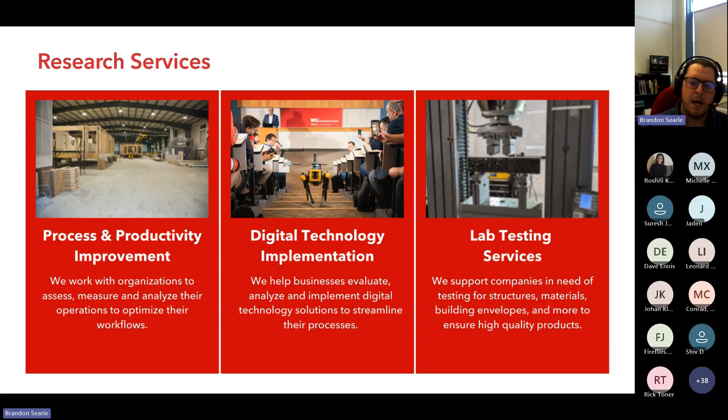Beyond that, and I guess kind of overlapping with our research services, are areas of expertise. So again, our process and productivity improvement, mostly led by our chair, Dr. Zhen Lei, focuses on productivity, safety, and quality improvements using simulation, optimization, different digital technologies, including scan to BIM, focused on optimized factory layout, as well as DFMA.

We also have digital tech implementation. This is focused on BIM and VDC, or new technologies coming into the sector that support moving activities from on-site to off-site. We're growing our structures and building enclosure testing lab, and that's in collaboration with Dr. Alan Lloyd here at UNB. We focus on panelized and volumetric modular connections, MEP connections, construction material testing, and recently launched our building enclosure testing lab off campus.

And then finally, the benchmarking and innovation in construction. We're seeing a lot more activity in this area where government and the industry is looking at understanding the maturity of our sector to respond to housing crisis, shortage in healthcare facilities, schools, etc. And so understanding what are the gaps, what training is required, what policy changes are needed, and how do standards and procurement strategies need to change. And so we do some research in that area as well.

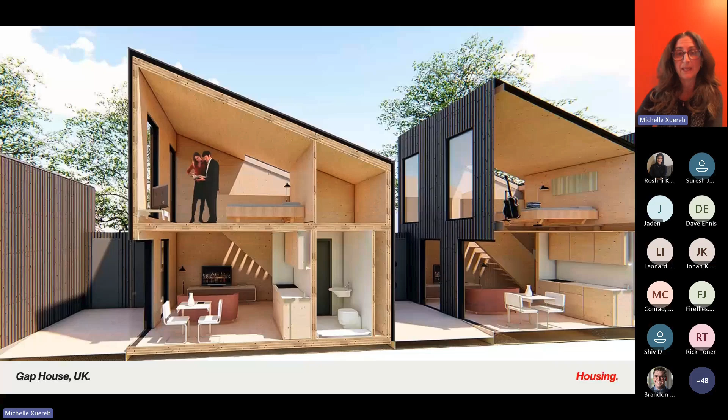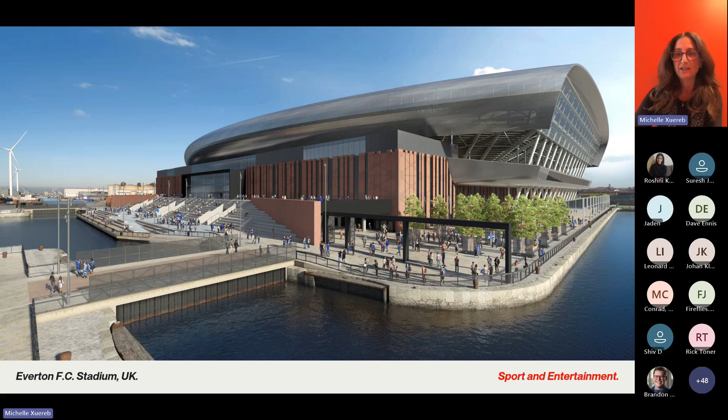Everton FC, so a new 50,000 seat stadium, which used a combination of generative design processes and hybrid OSC methods for prefabrication, prefabricated wall panels and framing systems.

Here in Toronto, we've got a huge portfolio of private sector multi-unit residential, spanning from mid-rise to high-rise, and with such a large and diverse client base and the knowledge of our UK counterparts, we've had an interesting platform from which to launch our efforts.

So first of all, why OSC? In terms of trends, we know that we have parallel drivers occurring at once: an affordability crisis, a housing crisis, climate crisis. And meanwhile, we have both a skills gap and a productivity problem in our workforce. In parallel, we have a technology revolution underway that we can use to shift how we make buildings from design through execution, where we can track supply chains, plan a building using principles of circular economy and design with considerations for how we assemble the building and then how we disassemble it at end of life.

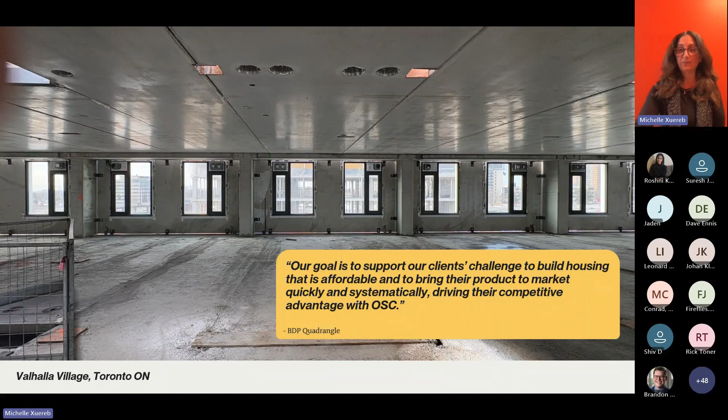Here at BDP Quadrangle, our goal is really to support our clients' challenge to build housing that's affordable and bring their product to market quickly and systematically. The purpose here is to really drive their competitive advantage using OSC.

I'm one of the co-directors of BDP Lab, which is a place where we conduct research across the practice. We collaborate with industry and academia, people like the University of New Brunswick, and we put this piece on DFMA, or design for manufacture and assembly, together as a snapshot of industry and ourselves in this context. It's sort of an internal document, but it got us all talking.

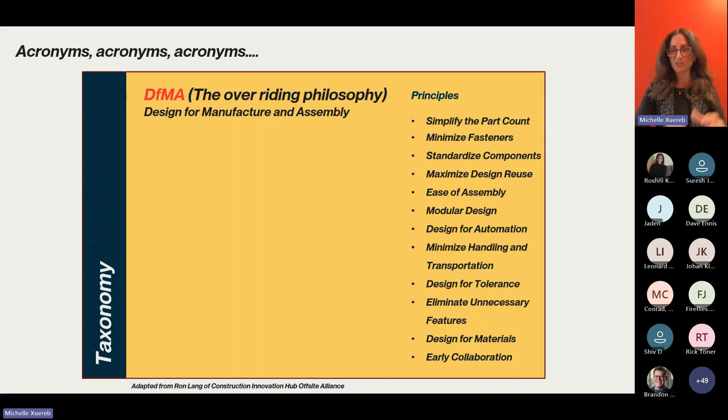One of the things that came up is that this field is extremely acronym heavy, so I like to start by defining the ones I'm going to be using. DFMA is really that overriding philosophy for all the means of delivering the offsite approach: simplifying the part count, designing for automation, maximizing design reuse. You've got the list right there.

In the UK, they tend to use the term MMC, or modern methods of construction. This tends to be the one I find most useful because it's a way of thinking about multiple non-traditional technical solutions to accelerate construction. Some of those methods are used offsite and some are on-site, and that's actually kind of how I've structured my presentation.

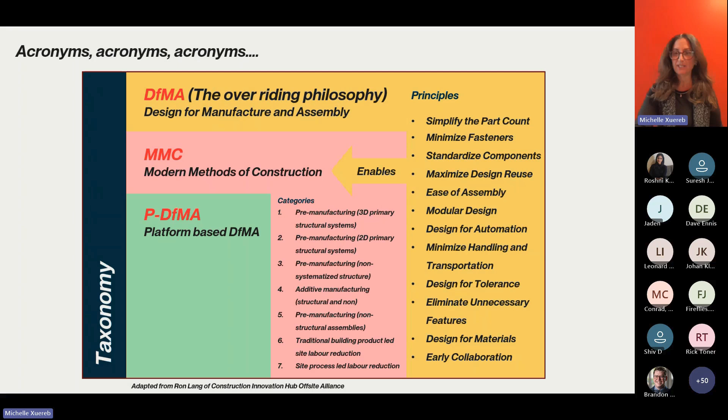Then you've got platform-based design, which is really something we're seeing evolve, where construction is thought about more like the automotive industry - product delivery rather than project delivery. So it's a very different way of thinking, and you're seeing some companies come out that maybe weren't even in the manufacturing side before - an interesting kind of emergence from outside the industry.

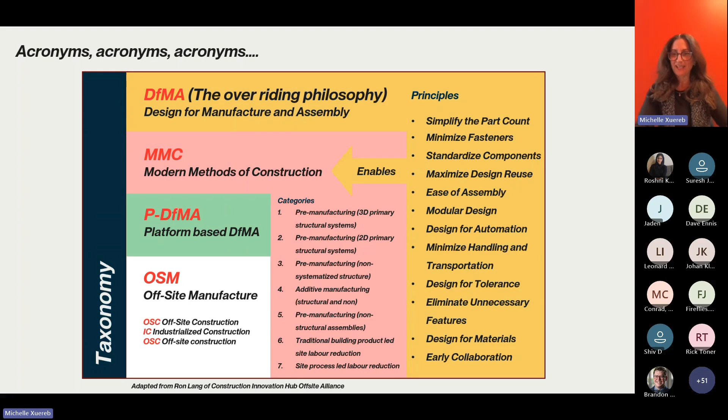And then, of course, offsite manufacturing, offsite construction, industrialized construction - we'll likely be using these terms interchangeably, but I liked this one piece that looks at all that taxonomy together.

So as I mentioned, I find this MMC category really useful as a way of organizing my thinking in this space, with the first 5 categories representing the offsite and near-site pre-manufacturing, and the last two being about speeding up that efficiency of traditional processes on site through robotics and other means. What I'm finding in high rise is we're really looking at those first five, and some of those more than others - you'll see some examples that I put out there.

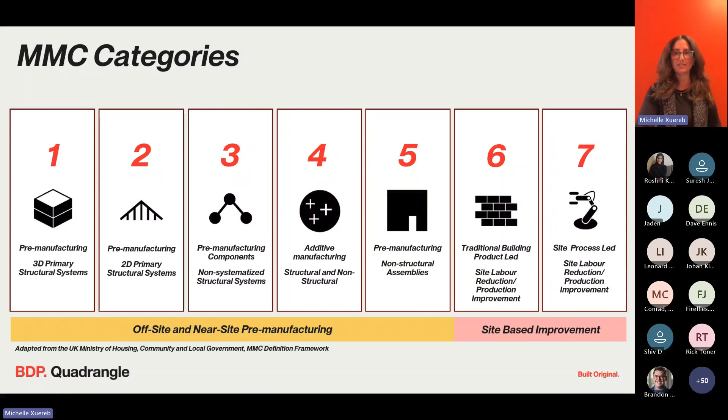I'm going to give you an overview of multi-unit residential projects. Some of them are by us, where I'll go into a little deeper detail - I'm going to go in deep on 3 projects, and the other ones I'll just touch on so we can get an overview of what's happening. Some of the precedents started in another sector, and then I'm going to demonstrate how they've led to innovations in the multi-unit residential space. And the other thing I'll say is I'm definitely giving it a slant from the GTA, or the Greater Toronto Area.

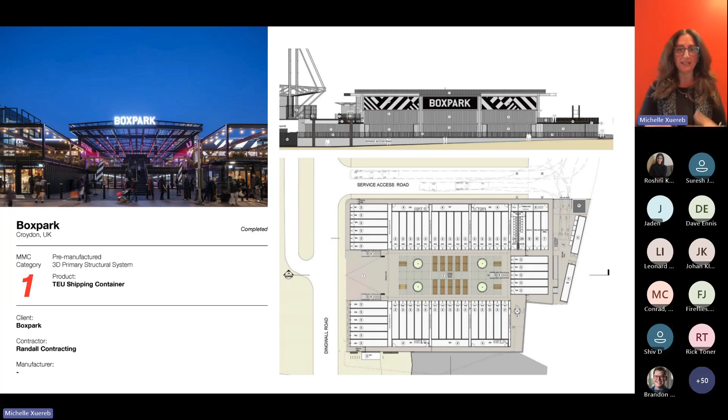Starting with pre-manufacturing, so 3D structural systems. This is the project I mentioned in the beginning, Boxpark, which was about reusing existing shipping containers on a site where nothing existed yet, to bring some economics to this neighborhood. It was meant to be temporary but has remained anything but. People really love it.

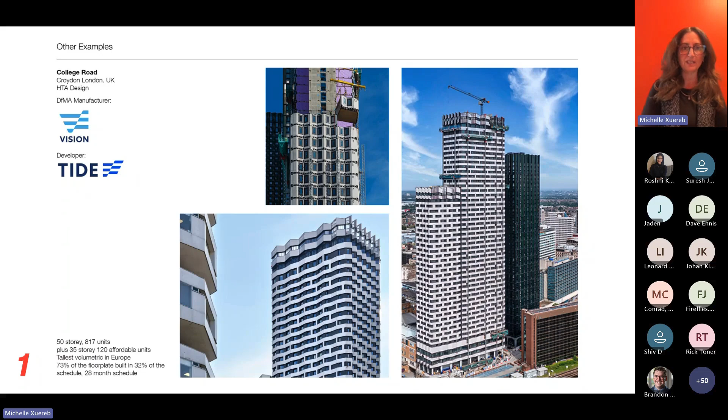For me as an architect, what I love about these is they don't look modular. You look at them and they've got an architectural finish to them, which tells me we're developing and getting further in this way.

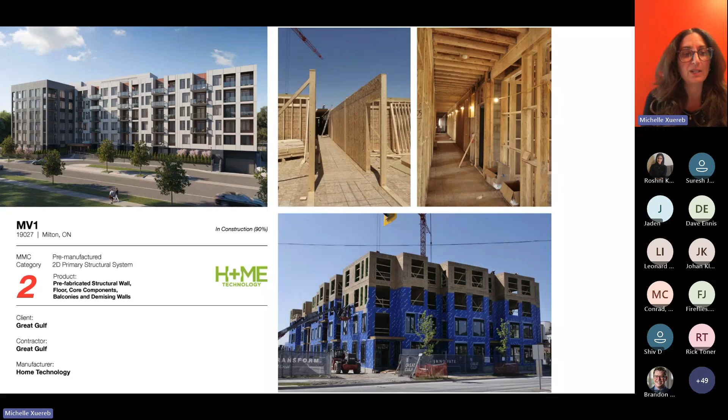So 2D primary structural systems - this is category 2. Some examples of things we've done in this space include MV1, structural wall panels - prefabricated structural walls and floors, and the demising walls. We've done a couple of these with Home Technology.

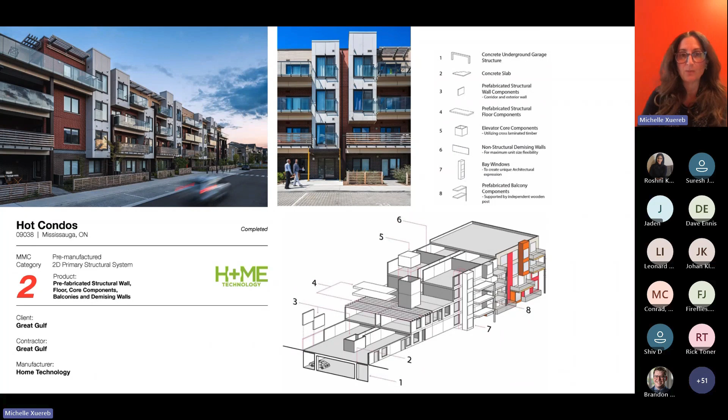Hot Condos was the first one we did - the first that they rolled out of their factory back when they were Brockport. We did a lot of learning about tolerances and how pieces fit together. And then, of course, other companies in this space like Assembly and Panelized.

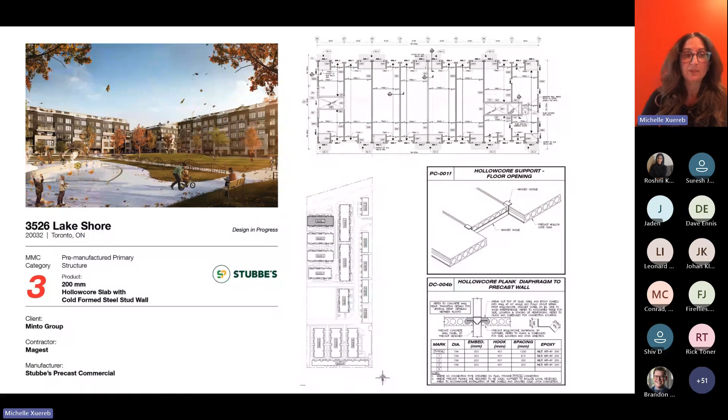Into category 3, pre-manufacturing components - non-systematized structural systems. This is things like precast hollow core slab, which we're doing on this one here on Lake Shore. This is all about the slabs and cold formed steel for the walls.

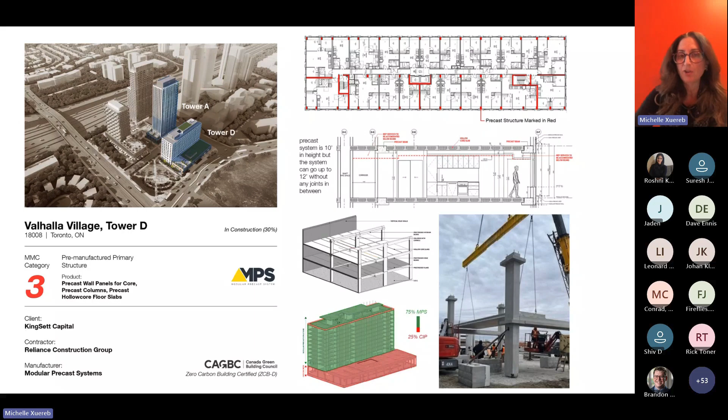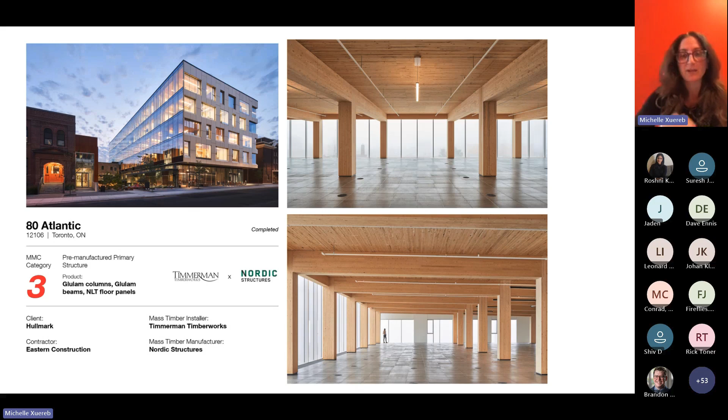This one is about mass timber. We used glulam columns and beams and NLT floor panels, partnering with Timmerman and Nordic. This was for Hullmark here in Toronto, and it was the first mass timber office building built here in a century.

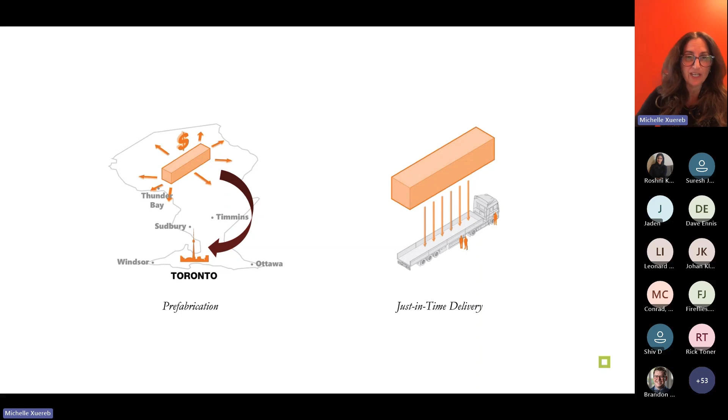Construction schedules really took advantage of this prefabrication - it was all about just-in-time delivery, and I got to see it live since this was one of my projects. It was exciting - one of the quietest sites I've ever been on, extremely clean, with things happening efficiently and effectively. It probably could have gone faster depending on when things arrived on site and how the logistics tied together.

This was the first one we were doing, and the first for a lot of the trades involved. And of course, one of the aesthetic advantages, speaking as an architect, is the ability to expose that timber.

So really here in Toronto, this has become kind of a hive of mass timber activity. Over the past few years, we've seen an explosion of mass timber proposals, a lot of them on the commercial side. And the question we were asking was, where is the residential?

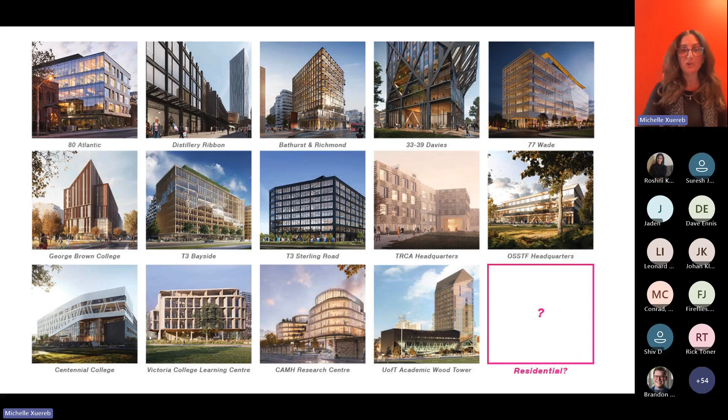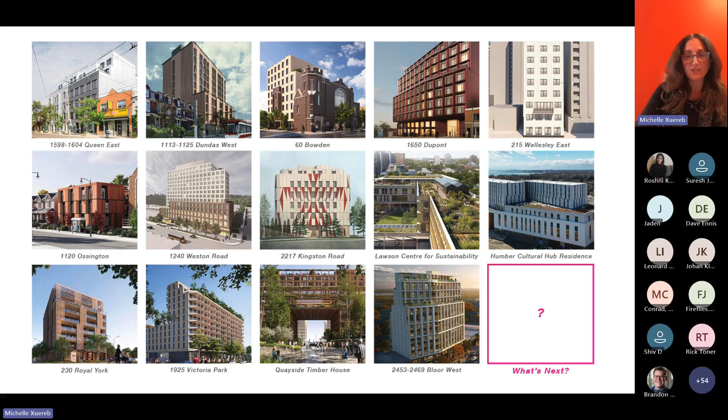There were a few low-rise mass timber projects initially, but since the Ontario Building Code introduced encapsulated mass timber provisions, we've seen a growing number of residential projects announced, appearing at a variety of scales and across a range of residential types.

So I'm going to go a little deeper into 2453 Bloor Street West. This is a mass timber building where it's the primary structural system, glulam columns and beams. It's really about understanding the differences between mass timber and what we've traditionally been used to working with at this scale of building here in Toronto.

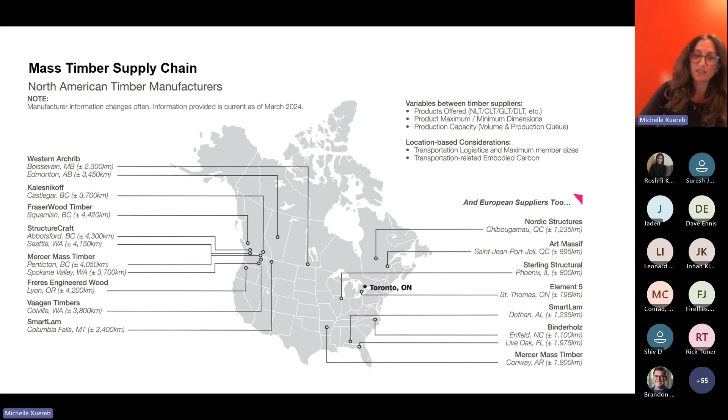The first piece was really understanding the supply chain. Where are things coming from? Who has things available, and how do we deal with that? How do we engage with this part of the industry? Given our experience on 80 Atlantic, we had a little bit of a sneak preview.

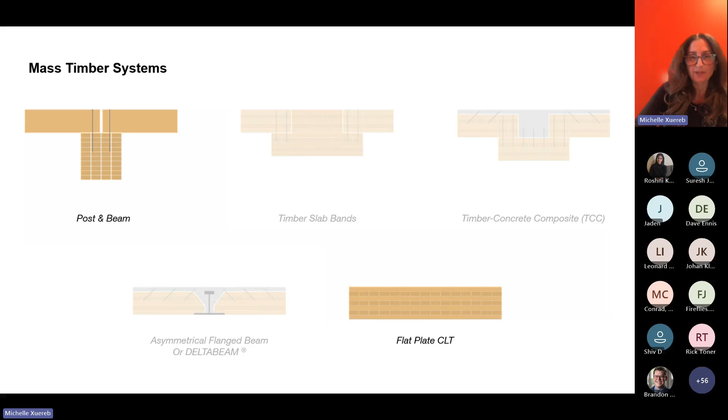So looking at what kind of systems exist: post and beam, timber slab band, timber concrete composite, asymmetrical flange beams, flat plate CLT. The focus for multi-unit residential was really on two systems, post and beam and flat plate. So we decided we needed to figure out how these applied and how you brought this into the residential side.

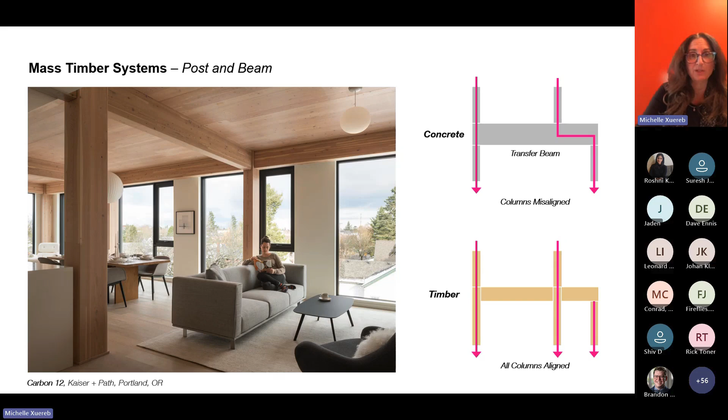Looking at things like structural alignment, which is always key, yet something we don't always tend to do here in the Toronto market. From these you can see it looks great on the inside in terms of finishes. Then you've got the flat plate CLT, which means you have no running beams to get across with your mechanical systems.

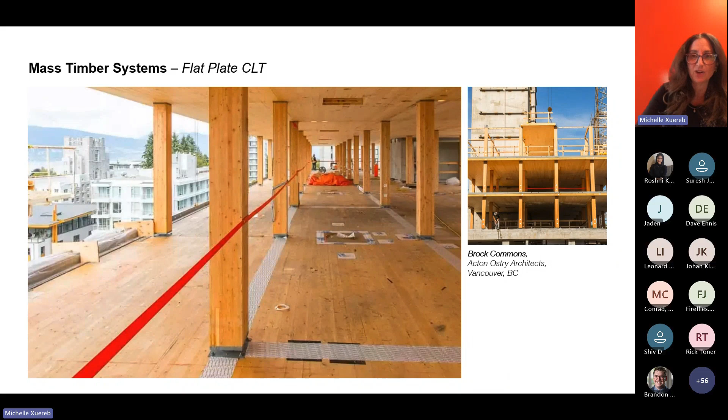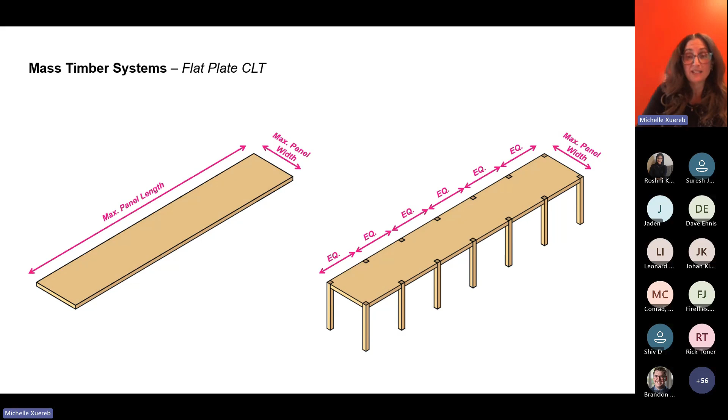This system requires each CLT panel to be supported by columns at regular intervals along the panel length. For maximum structural efficiency, these columns need to be placed between 3 and 3.5 meters apart. Ideally, the spacing is determined by the supplier's minimum or maximum panel dimension, because the larger the panel, the more efficient.

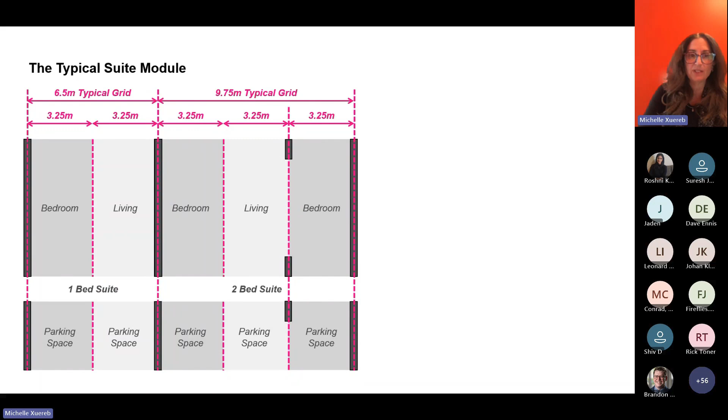Just a couple of examples here with Brock Commons. For us, we took our typical suite module and asked how this actually applies. So taking your parking module, knowing you have to run these on top of each other, what should that grid size be? Then working with a local example, looking at Element 5 in St. Thomas, Ontario.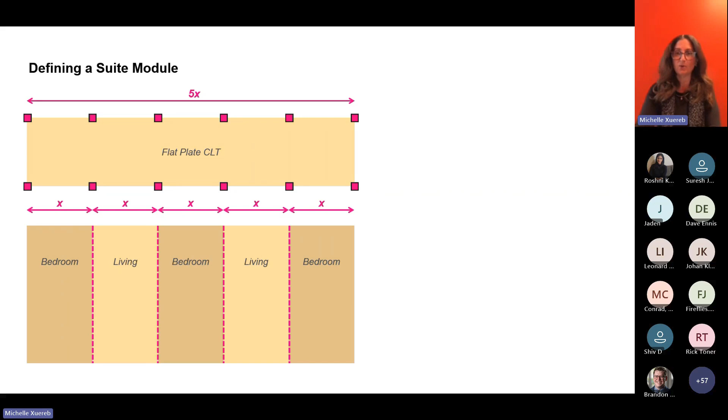We're looking at an overall panel length of 16 meters and a maximum width of 3.1 meters, and then how each of these would ideally be spaced over the panel length to work with the room layouts. This naturally begins to define our typical bedroom and living spaces, and our resulting suite widths and suite areas.

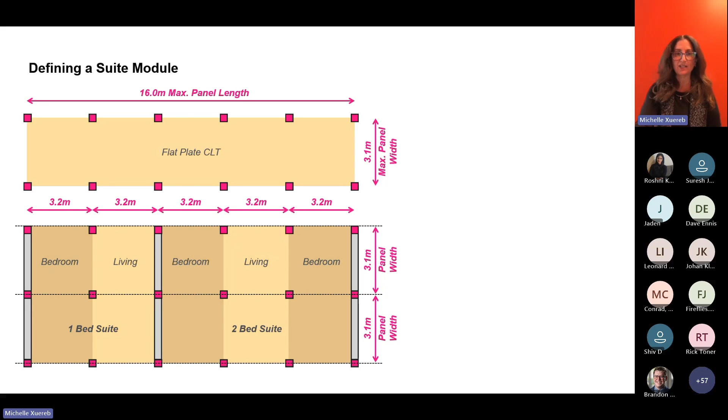Zooming out again, this is exactly the approach we took on the development on Bloor Street, where we began by laying out those panels, layering on the grid spacing for a flat plate CLT system, and then selecting that column spacing as we talked about.

Then defining where those panels, where the center of the floor plate is the zone for all of the vertical circulation services, leaving those outer panels clear and available for the suites.

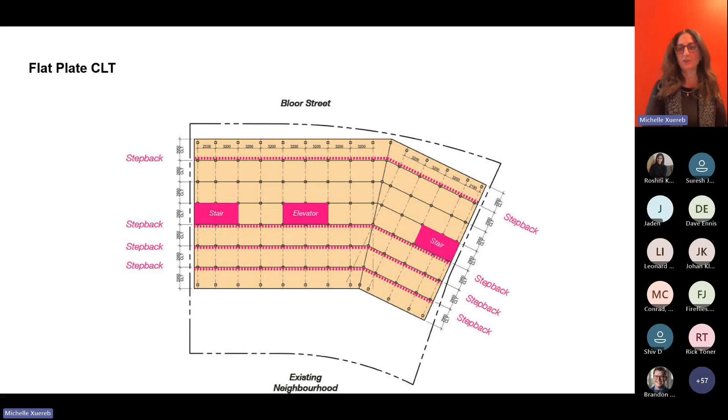Given that this is an intermediate rise building here on the avenues, we're required to do some stepping back, so we knew we had to have an awareness of that. If we just followed the pure zoning, those step backs would be a little more arbitrary, but knowing we're working with the CLT, we had to step back at more regular points.

Adding in that corridor, getting to the point where you've got a typical floor plan based on a mass timber structure, meant having to start this process right at the very beginning of the design. Then when you go up through the levels of the building, maintaining this consistent structural logic, really defined by the ideal proportions of the CLT.

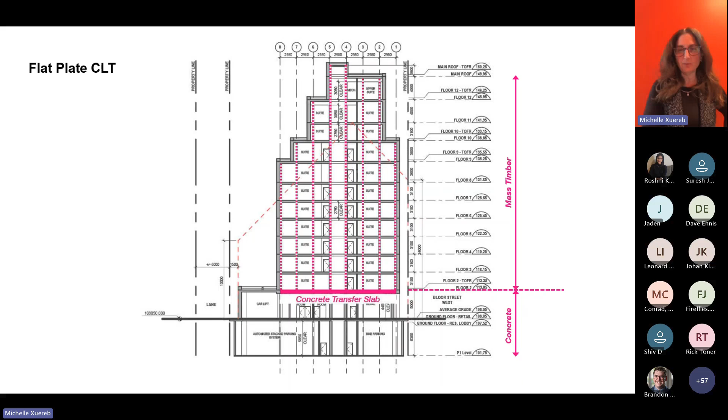So it resulted in a pretty standard looking building, but underneath it's really an efficient timber structure with the potential to deliver a building that's faster to construct and significantly lower carbon, especially compared to what we would normally be building at this scale, which would be cast-in-place concrete.

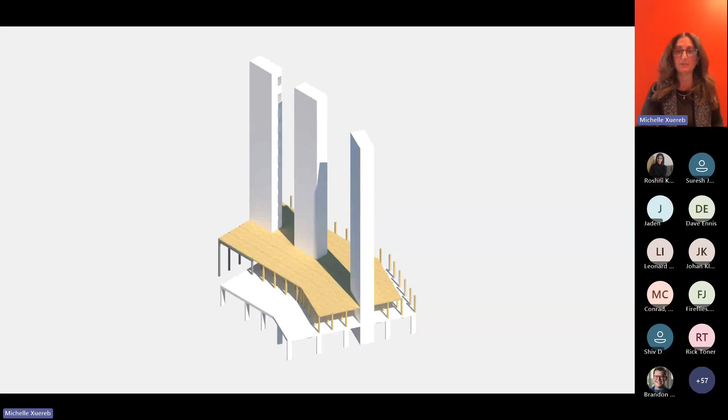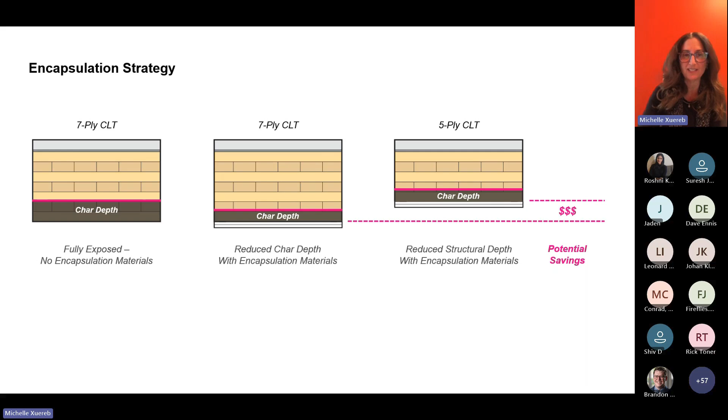To build at this height, you have to encapsulate mass timber, or if you want no encapsulation, you need to leave a big enough char depth, and then those panels start to get quite thick. You can see those dollar signs there.

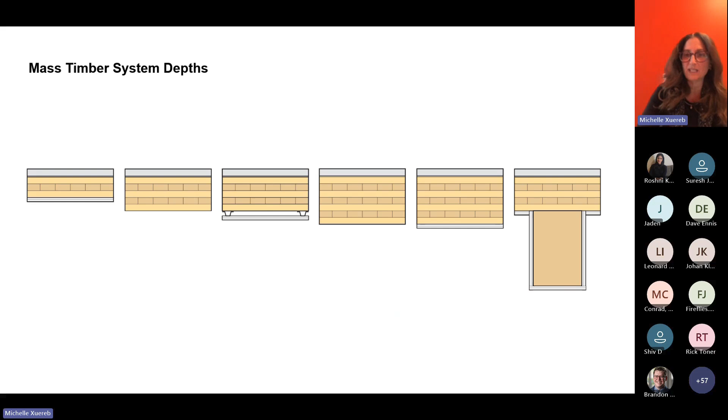So really trying to minimize those panel thicknesses to bring in some potential savings. Across this building, there was about a 30% reduction in wood volume to get to this smaller size, which was great. No matter what depth you do, you really have to think about it in terms of what it is you're doing and where you're placing it on the site.

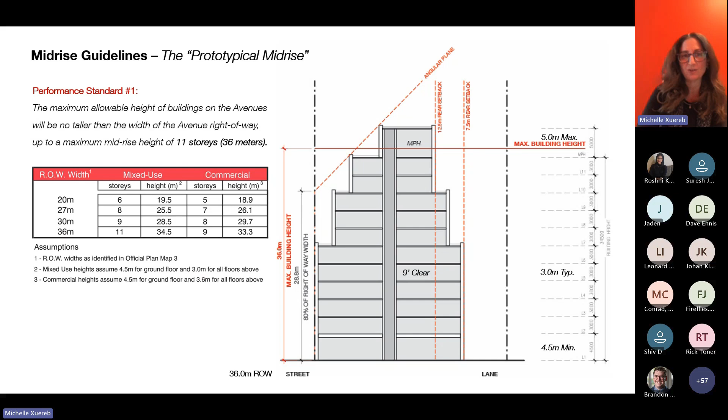So when you start to introduce things like a CLT plate, where instead of 200 mils thick, you're adding a thickness for the CLT plus the buildup to the encapsulation, you start to stick out of that zoning. And when you move into post and beam, that's even thicker.

So this difference in height is one of the biggest reasons why this Jane and Bloor project chose that flat plate CLT. The difference in the floor height requirements was really the least significant compared to the baseline zoning assumption.

So again, back to why thinking about modern methods of construction matters in the earliest days — when we're doing rezoning, we're years away from being able to realize the project, but if we're not doing this thinking early, we miss out on these opportunities.

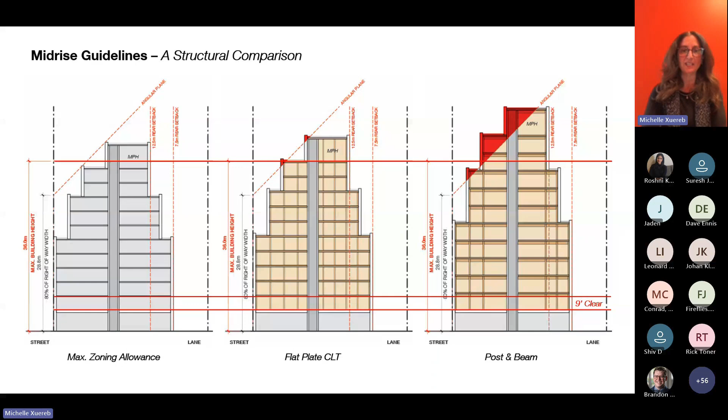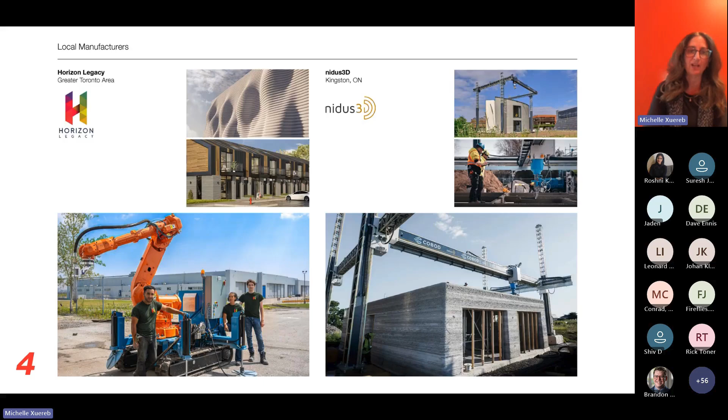Moving into category 4, we don't really have any experience in this sort of additive manufacturing, but we're starting to see these companies coming out which are really super interesting, working in the lower rise housing sector around 3D printing. I'm excited to see what they do on the larger side as this develops.

And then into category 5, where we're talking about pre-manufacturing, so these non-structural assemblies. This is where we've started to see a lot of uptake, especially on the high-rise side. So we're just finishing up the CG Tower.

We've occupied the bottom half of this tower. It's a 60-story tower in Vaughan, and we used these precast panels with the windows pre-installed. I'll talk a little bit deeper about this one.

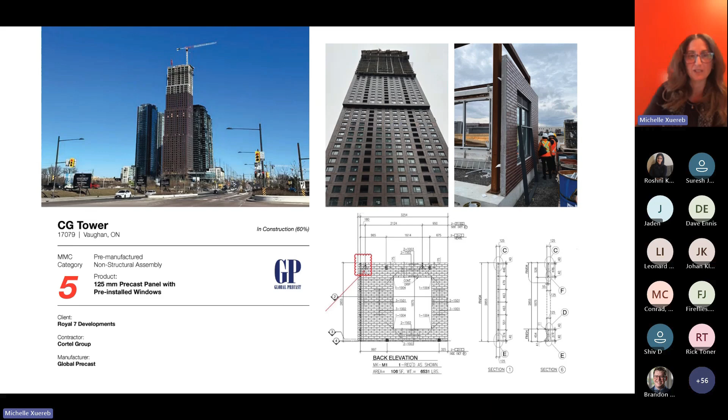You can see the sections here, so you've got it sort of stepping back in one dimension and then sort of flat plate on the other. And then these are the elevations.

You can see we've done something extremely regular with the patterning of the facade. We worked very carefully to make sure we only had a handful of window sizes and panel sizes to work with. Here you can see the mock-up.

So the mock-up was actually built. Our partners in this — it was the Cortel Group, who was the client, sort of developer, as well as the contractor — and this was Global Precast and AWD, who did the windows.

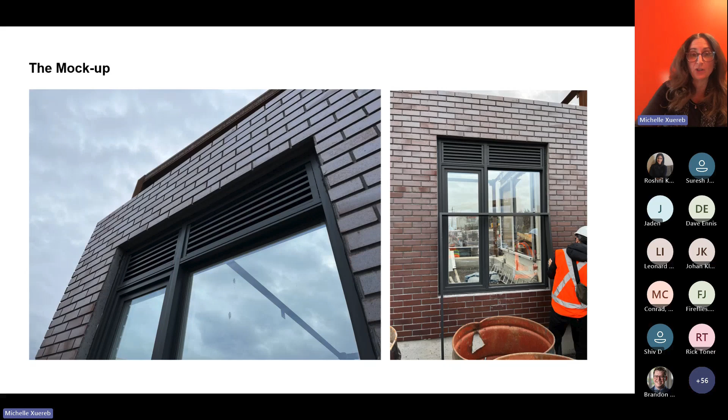And this was built in Global's yard. So they installed the windows, and then we went in to take a look at the mock-up. And then the air and water testing was also done there in the yard.

And so the great thing here was you could figure out all the issues and decide on a better way of doing it before you got to the site.

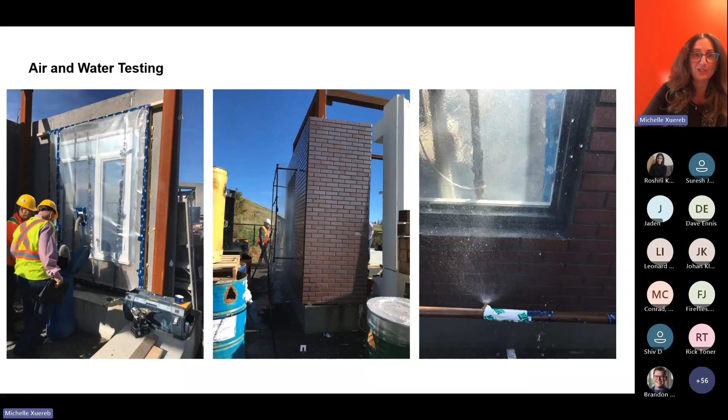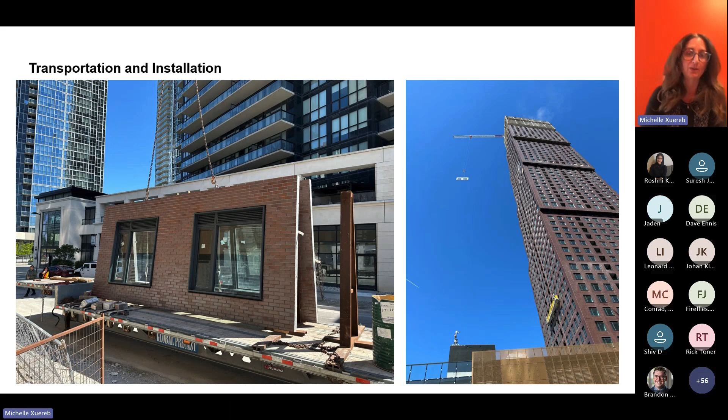And then here you can see transportation and installation. They were brought in on flatbed trucks — you can hold about 4 panels per flatbed — and you can see them being hoisted up in the air. They said they could do about a floor and a half a day, but given that they had to share the crane time, they would split this over sort of 2 afternoons.

As we were wrapping up this project, we held a post-mortem with the client. I do think that when you're doing new things, one of the most important things is sitting down and having a conversation with the client afterwards about how it went.

They found that the system far outweighed the challenges, and it was all about coordination of the crane time, and coordination of the manufacturing timing and installation logistics between the window manufacturers and the panels. If one got ahead of the others, you'd end up with a buildup of windows or panels.

It was great because what they ended up doing is building a tent in the precast yards, so the window installers came to Global's yard and did the installation right there. They were warm, they weren't up high, so it was less dangerous, and they could bring things up to a higher level of quality control.

The other benefit that came out of this is normally you'd be hoisting these windows up along the hoistway, so they found less hoistway congestion for the rest of the trades, and also a 30 to 40% savings on winter heat.

Originally they'd been worried about damage to the panels or the windows in transportation, but they confirmed that nothing happened, and they believe there'll be cost savings the next time they do this.

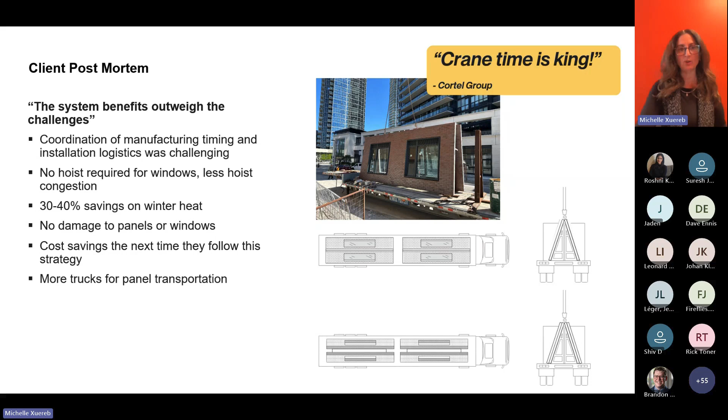The bonus here is that after they did this, they said, okay, now what's next? Now we're working with them to develop a panel that has a balcony integrated as well. So the key is continuous learning when you're doing things like this.

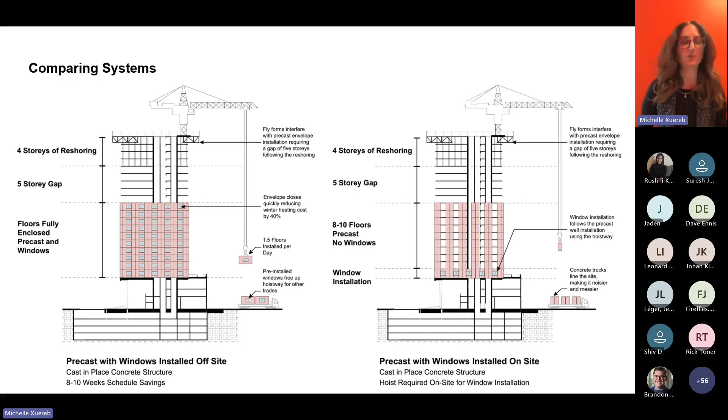This was sort of how they described the differences between, on the left, our precast with the windows pre-installed, and on the right, doing your precast pieces and then installing the windows after. They found there was about an 8 to 10 week schedule savings between these two systems, which I thought was really interesting.

Another thing we did to speed up construction was, halfway up, we put a mechanical penthouse and separated those elevators so that they went about halfway up the tower, and we were able to get occupancy of the lower half before the upper half.

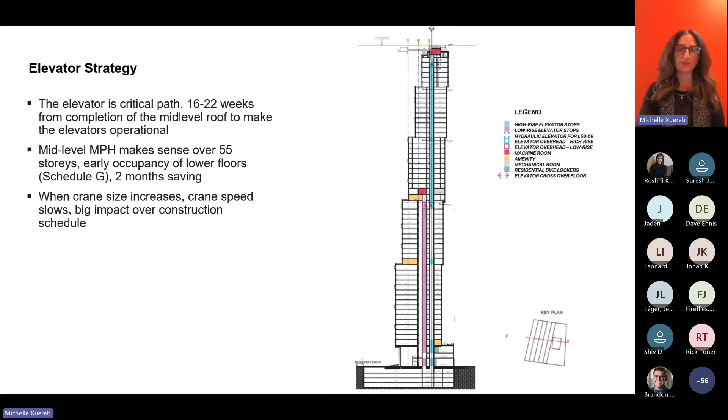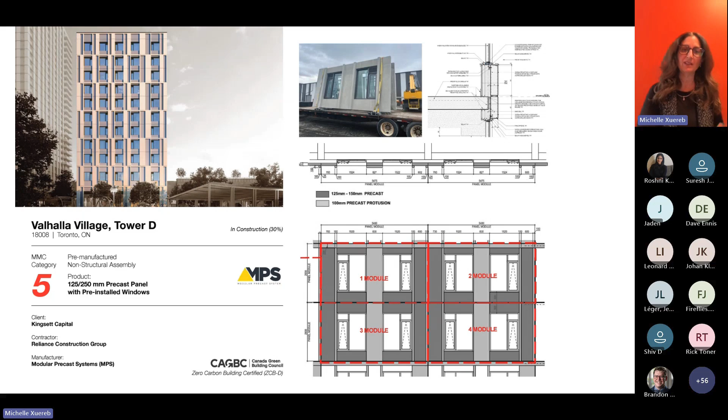The next project is Valhalla Village Tower D. This is the one I showed you previously where we did the MPS, the structural system, and we also did the wall system.

Here's the two buildings. On the left, you've got Tower A, which was done with standard traditional construction, and on the right, you've got the modular precast.

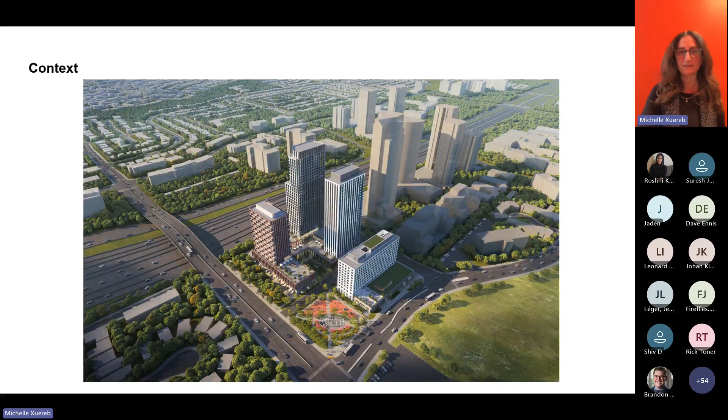So the building is 11 stories. This is what it looks like.

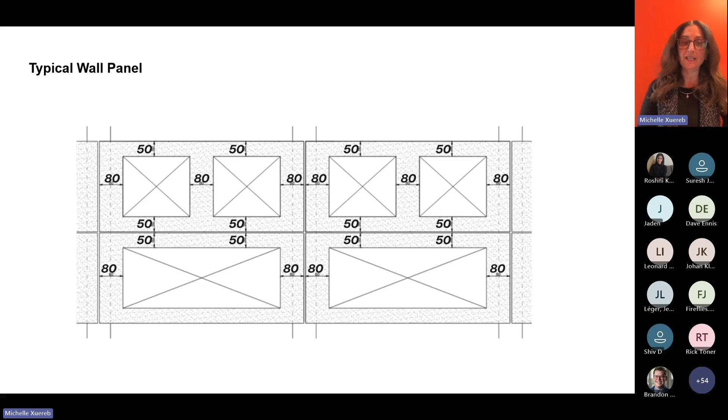Here you can see the typical wall panel. You need a bit of an edge around the whole thing so it has structural integrity as it's being transported and lifted to the site. So you end up with a punched window approach, which also works for sustainability.

Here you can see a typical floor plan. You can see just three columns in the north-south direction, which is just great, and then you've got your beams running in the other direction. So it really kind of regularized things.

This project was designed not in this way originally, and then this was actually a value engineering exercise, which was kind of interesting. Here you can see a typical suite layout.

What you've got in blue is a bulkhead around the outside edge, and this is that edge beam, so it's just slightly deeper than what we would normally have in typical construction. But other than that, it's pretty much column free.

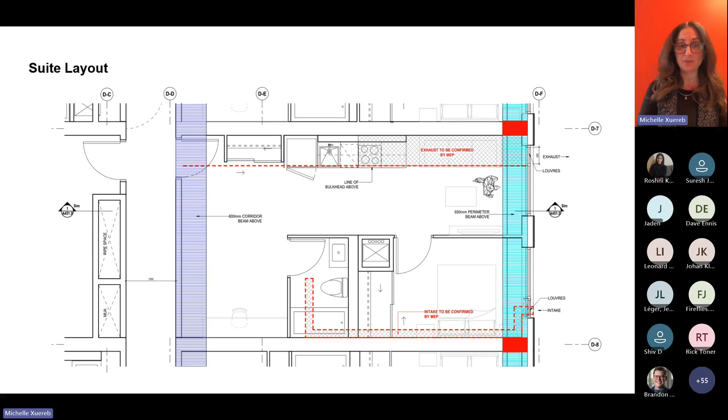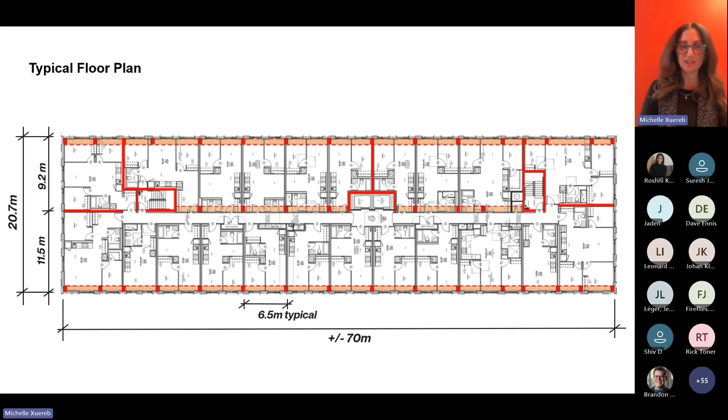Here in Toronto, we do tend to love our shear walls. Normally between suites, you'd have shear walls running between the suites, but instead these are done with a steel stud gypsum board buildup.

Moving to site, we got to see the mock-up, built up in the yard. This is at MPS's yard, and they did both the wall system and the structural system.

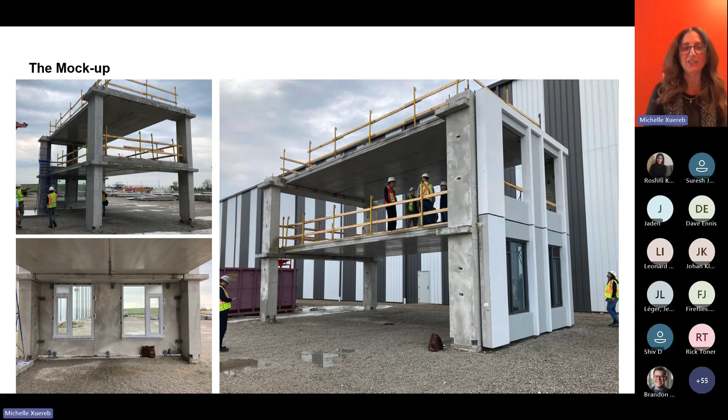So now you've got two modern methods of construction happening in parallel, with one manufacturer doing both of those things, with the windows coming from state and being installed on site here.

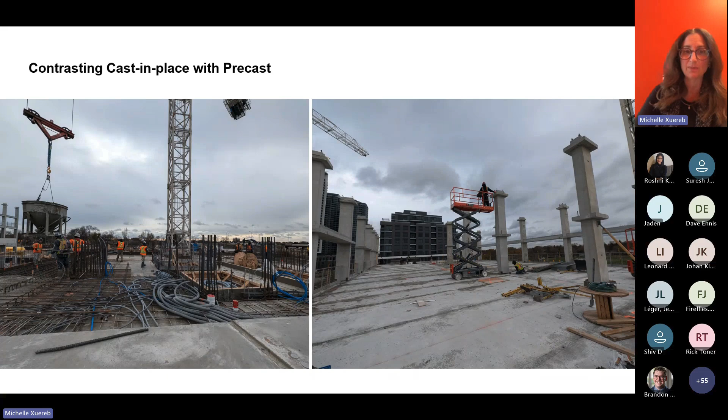More of the work is happening within the factory, and definitely a little bit less chaos happening on the site. On the left, you've got your reshoring.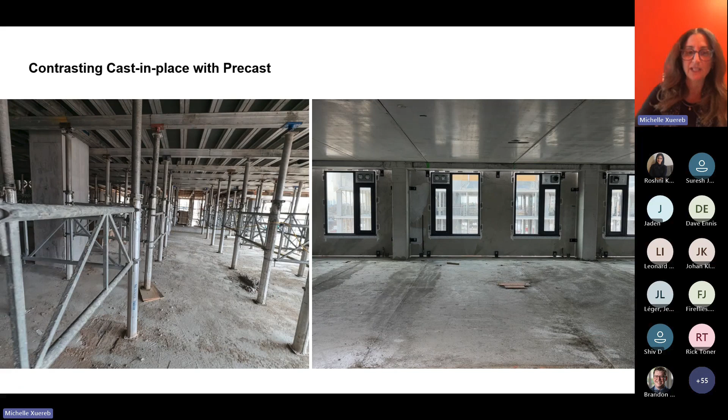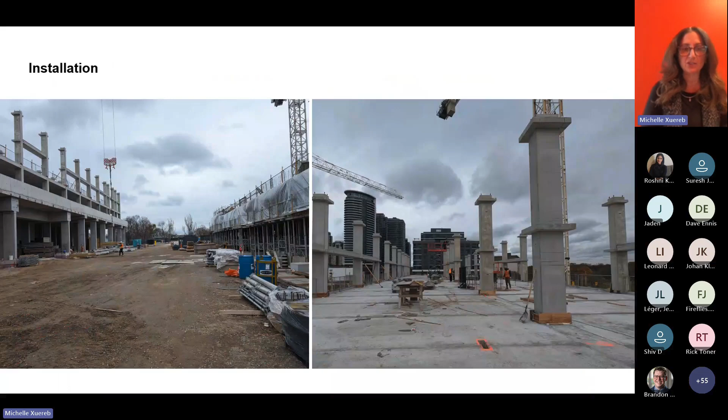On the right, they're working immediately above this, and it's nice and clear, no reshoring. Then on the left, again, contrasting the two. Here you can see the structural walls coming to site, and then the two-story columns, and then starting to lift those panels up on site.

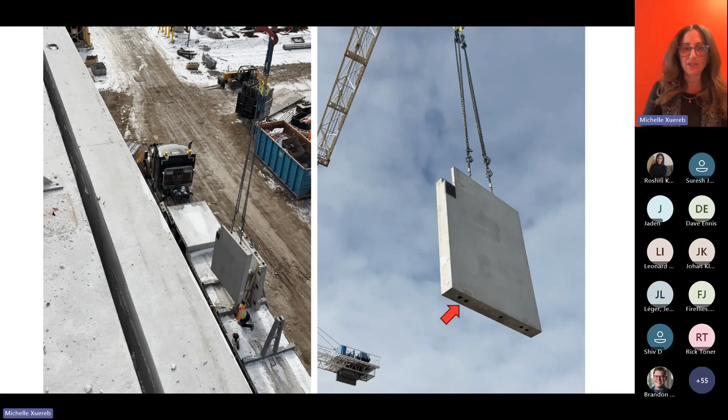On the underside of those structural walls, you've got these holes, and those are cast into the precast, and they slide over this rebar that you see on the left-hand side. When they crane it in, they're sliding that down over the rebar. On the left here, they throw in some grout underneath, and then those holes are filled by hand on site. So those tubes slide over the vertical splicers, and they're later grouted with a high strength grout.

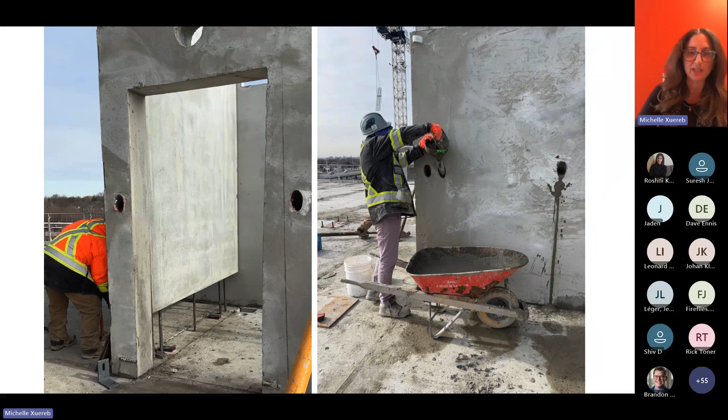Here you can see some of the details. The windows are all caulked and put in place before they come here, but then there's a lot of sealing and fire stopping that needs to happen between those structural panels. So you get a different mix of workers where you might have form workers and steel workers on the traditional site. Here you've got people doing sealing and caulking and putting things into place.

Again, the nice clear view, and then looking out across to the site adjacent that has all the reshoring. We did another comparative diagram.

On the left, you've got that precast concrete structure going in with the walls. Let's say it was a 20-story structure, comparing that to building a 20-story structure using cast in place, and then a standard precast with windows being installed on site. We found that there was about an 18-week schedule savings.

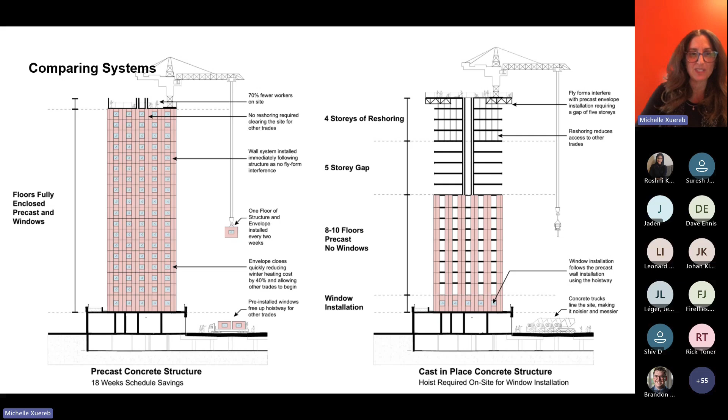We're working with Reliance Construction on this, and they're going to give us the summary at the end of the day once they're done. But for now, this is our estimate based on what we're seeing. They think they can get to a turnaround of one floor fully installed with the envelope in 2 weeks.

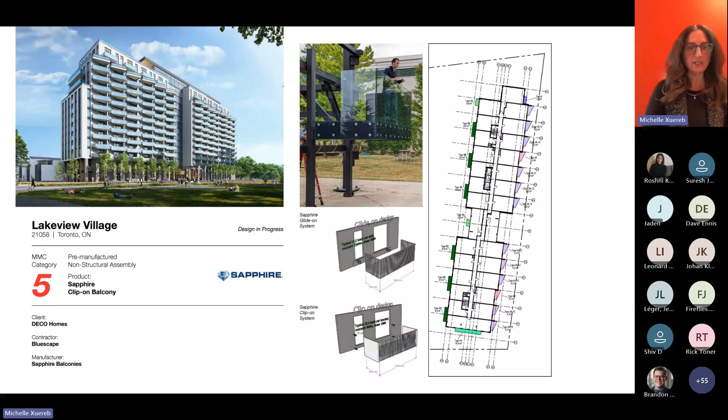Here you can see the design drawing on the left and the reality on the right. Then a few other examples. Going from precast, which is pretty common here in Toronto, moving into these other products that are coming to market - things like these clip-on balconies.

Moving from that, what you see on the bottom is these local precast manufacturers combining with things like these balcony manufacturers. So Sapphire Balconies working with the precasters to come up with ways of making those systems fit in, because at this point, the connection between the precast and that balcony system - there wasn't a good way to connect it. So they're resolving those issues.

Now the next thing that we're going to see is really these high performance wall systems. We're starting to see this with UnitiWall - this is a U of T academic building, hoping to eventually see this on the residential side. But at this point, it's sort of not at the right price point.

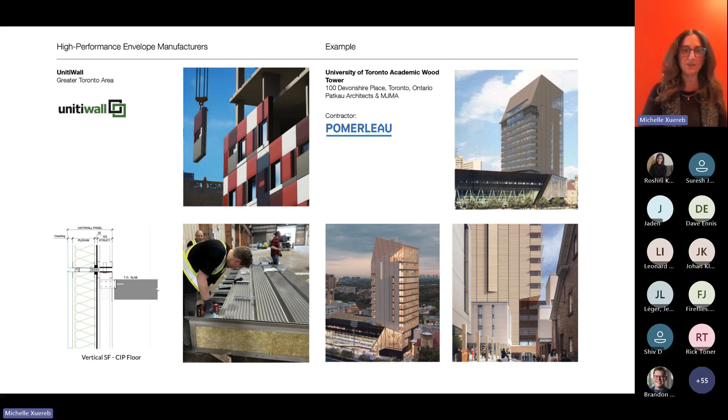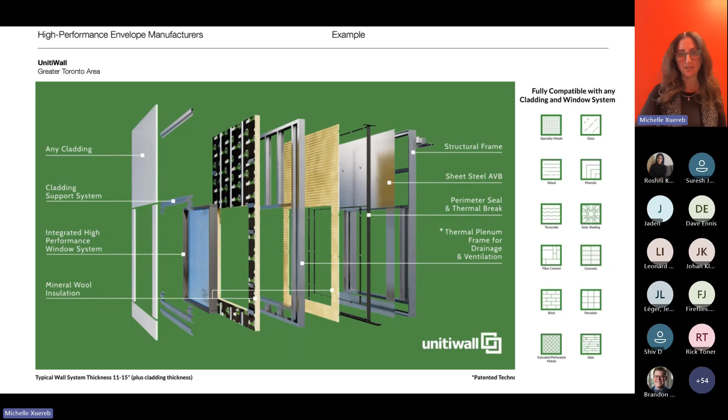But I think as we move into these higher levels of sustainability performance, where we're required to meet near passive house levels - the Toronto Green Standard is our green development standard - as those levels of performance continue to rise, I think we're going to see more of these precast or pre-assembled, high performance wall systems coming in.

Part of that, I think, has to do with the quality of the concrete pouring that happens on the residential side, which doesn't seem to work to as high tolerances as the commercial side. So perhaps that'll shift now that we're seeing more of this precast structural system happening.

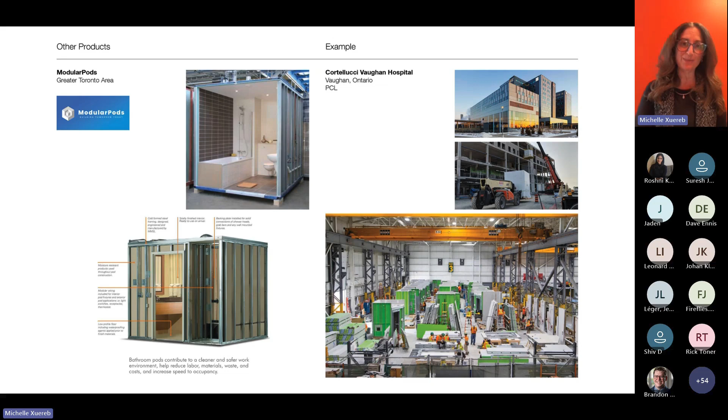So let's look at what's next. What we're thinking about here at BDP Quadrangle is the power of concurrent engineering, a systematic approach that thinks about this more like product design—how can we shorten up these systems, understand what's happening at the very beginning of the brief and with the zoning, and bring these conversations to the earlier part of the design stage. We can't be thinking about these when we're going out for procurement; we need to bring this conversation to the front end, which can be a very long timeline.

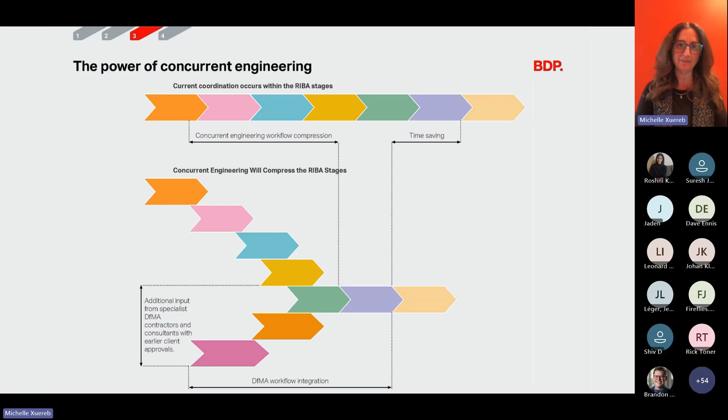The other thing we're thinking a lot about is unlocking continuous improvement. That's another piece, like the example of the CG Tower project, where it was really about making things better from one project to another, especially when working with a client over multiple projects. It just makes sense—let's learn from what we did, let's make it better next time, and let's try one new thing on each project.

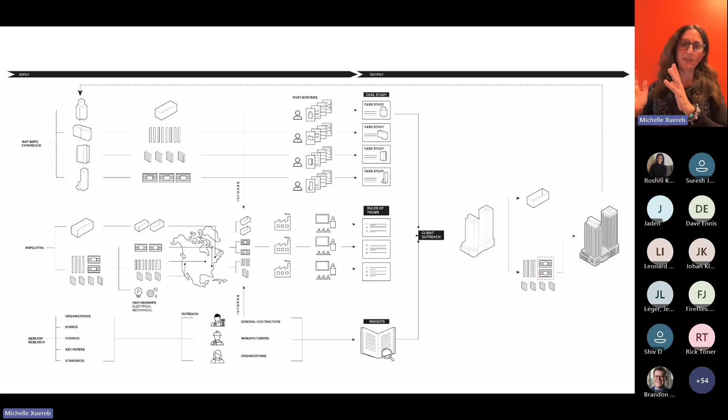Then we're sharing those and looking at systems—what's actually out there and available. You saw bits and pieces in this presentation: mapping those things, doing factory visits, doing some deep learning, and then rolling out rules of thumb for these various systems, looking at the overlaps. What we really want to do is simplify the thinking around this and bring that into our front end delivery. And then, of course, doing this market overview, talking to various people, having conversations, and bringing those insights in—using those three things to take it out to working with our clients and partnering with them on projects, whether it's on the volumetric side or the hybrid construction side.

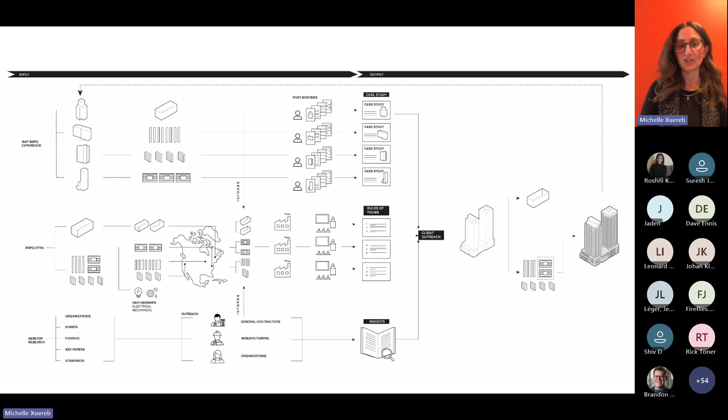And with that, I will stop there.